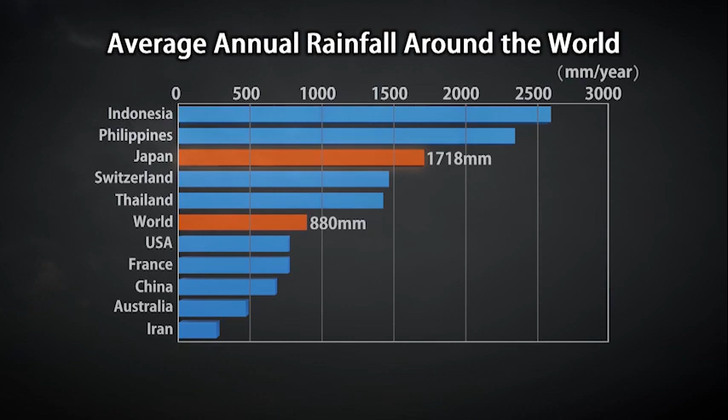Located in the Asian monsoon region, annual rainfall in Japan totals about 1,700 millimeters. This is about twice the global average. Rainfall increases from June to October due to the rainy season and typhoons. In addition to the steep, mountainous topography, the climate makes Japan prone to floods.

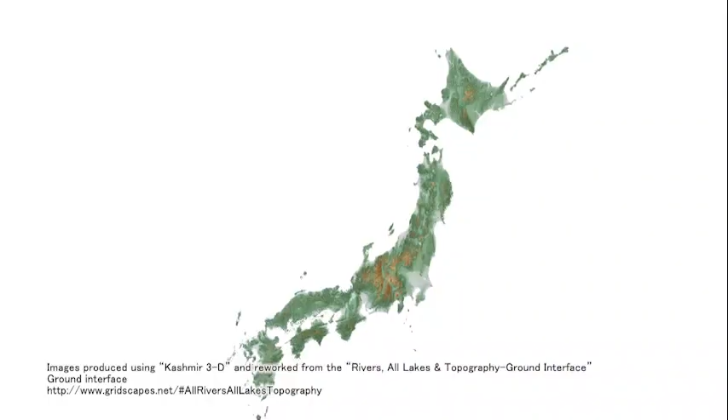With economic growth, significant urbanization took place in Japan. Japan is a small mountainous country, and the population is concentrated on the plains, which account for less than 30% of the country. These images illustrate the urbanization of Tokyo, Japan's capital.

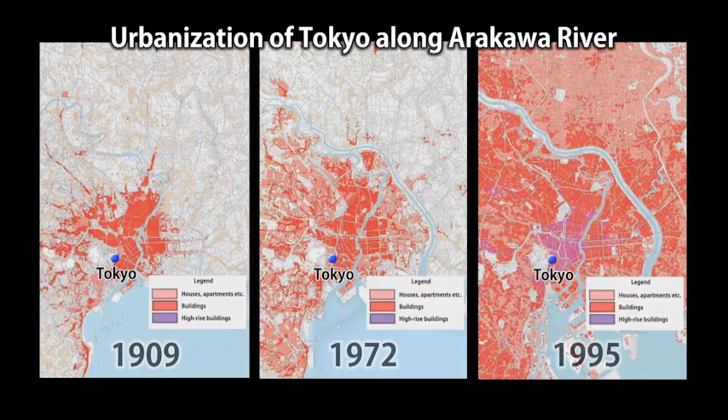Japan's three major metropolitan areas are below mean sea level at high tide. About 50% of the population and 75% of its assets are concentrated in areas prone to flooding and inundation. Cities developed even in areas with a high risk of floods.

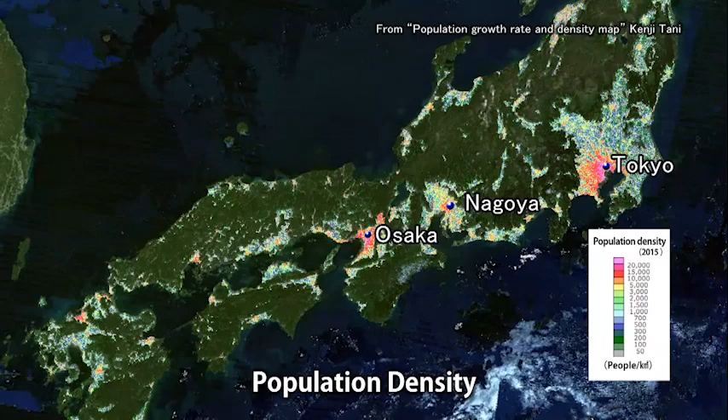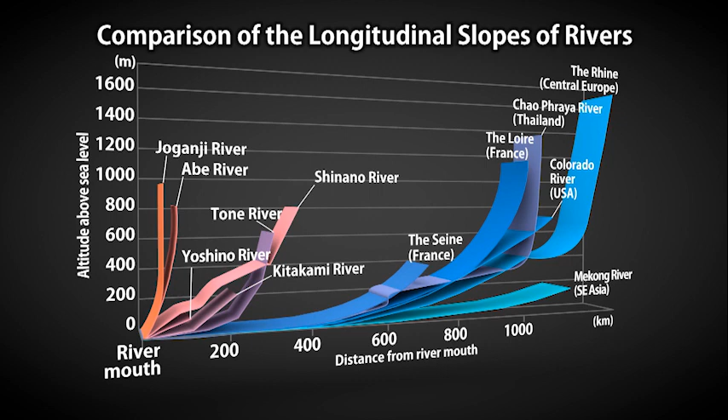Rivers in Japan are quite steep, and their distances from headwaters to mouth are short. Once rain falls, water levels can rise suddenly and reach flood levels in a short time.

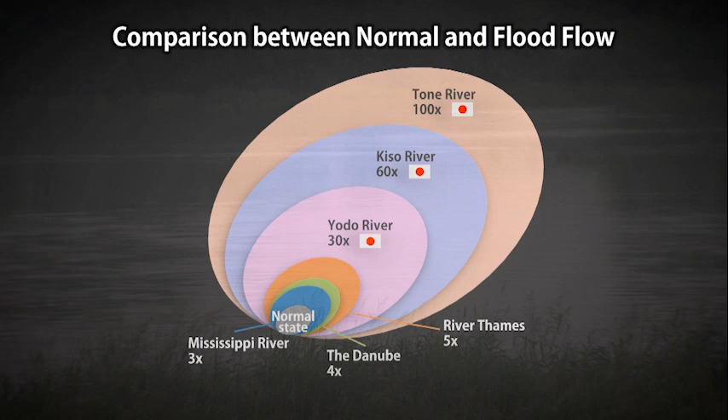During flooding, the flow rate of the Tone River, which has the largest river basin in Japan, can be as high as 100 times the normal rate. This compares to 4 times the normal rate for the Danube and 3 times normal for the Mississippi River. Japan's rivers tend to see sudden, massive flooding that spreads downstream.

The greater need to pursue flood risk reduction measures emerged while struggling to ensure sustainable urban development in river basins. Japan therefore began integrated river management. The government established a law that identified where responsibilities lay, with river administrators in charge of daily maintenance, flood control, water utilization, and the environment.

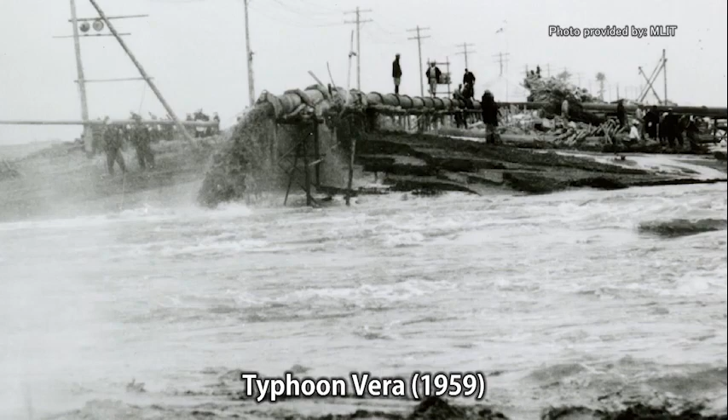Typhoon Vera, which killed more than 5,000 people in 1959, was a wake-up call for Japan. As a result of investment in disaster risk reduction, the number of flood-related deaths successfully declined to 1/100th of that in the 50 years since. The risk reduction measures also supported economic growth.

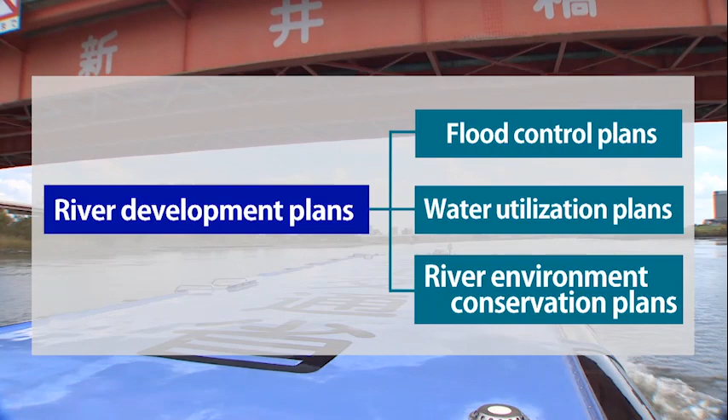Rivers have flooding characteristics that depend on topography and climate. To ensure efficient and effective management, river development plans must be formulated in accordance with the characteristics of a river. River development plans consist of flood control, water utilization, and river environment conservation plans. Let's take a look at the process of formulating a flood control plan.

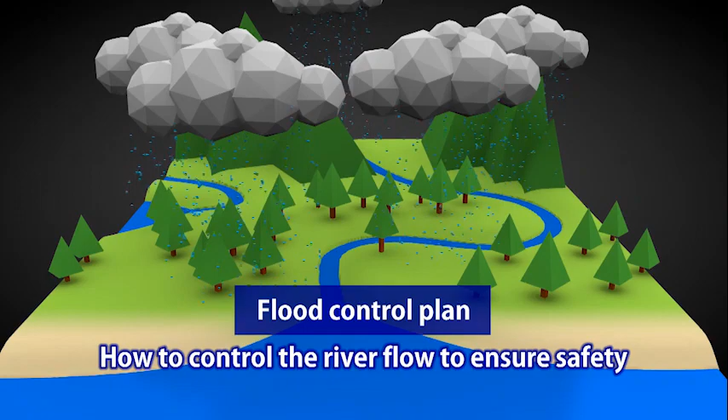This is the flow of flood control plan formulation. A flood control plan estimates how much rain falling in a catchment area will flow into rivers. It considers how to control the flow to ensure safety. In Japan, the target of the plan is based on such matters as the basin's population and assets, the priority of the river, and its disaster history.

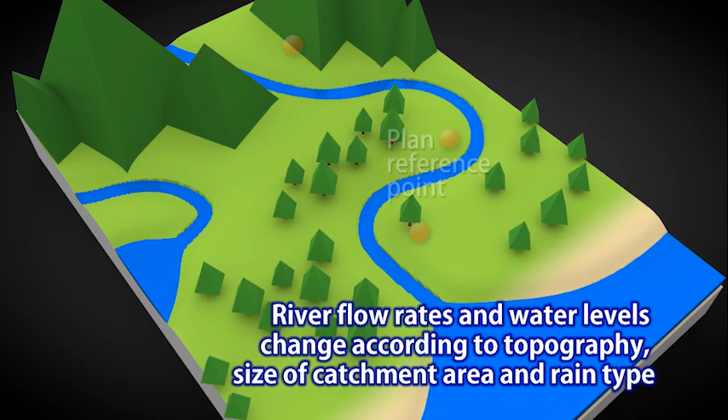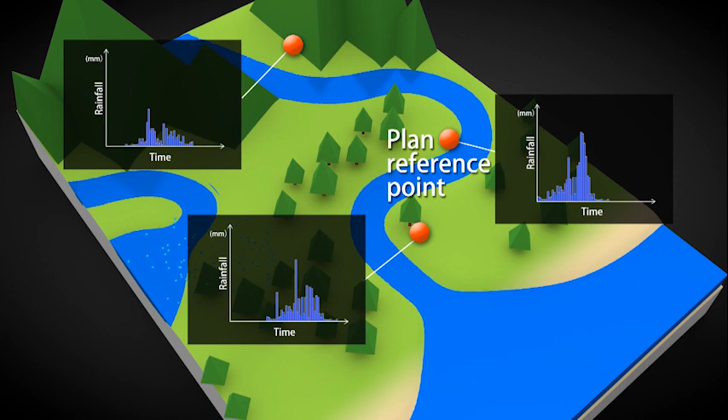A river's flow rate and water level differ according to topography, the size of the catchment area, and the amount, intensity, and duration of rainfall. The runoff of rainfall to the rivers is assessed according to river discharge capacity and land utilization of the catchment area.

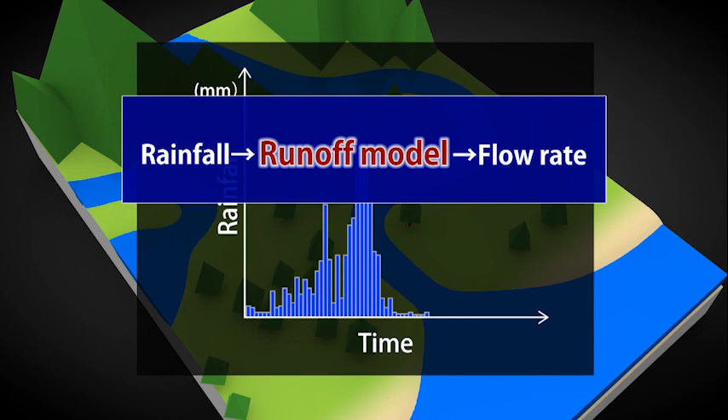Surveyed data convert rainfall in the catchment area into a river flow rate with a runoff model, using data such as past rainfall, river water levels, and flood watermarks. The repeatability of a model is important when forecasting flow rates. The accumulation of past data and its reliability play a crucial role in creating a good model.

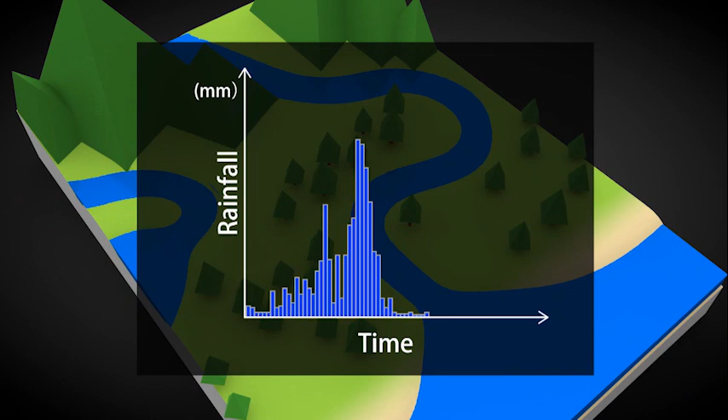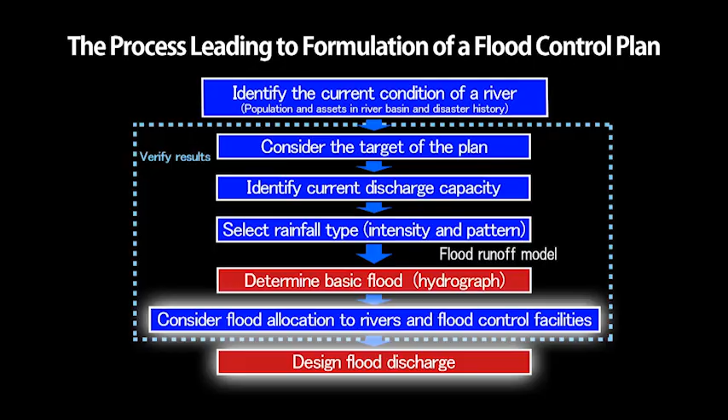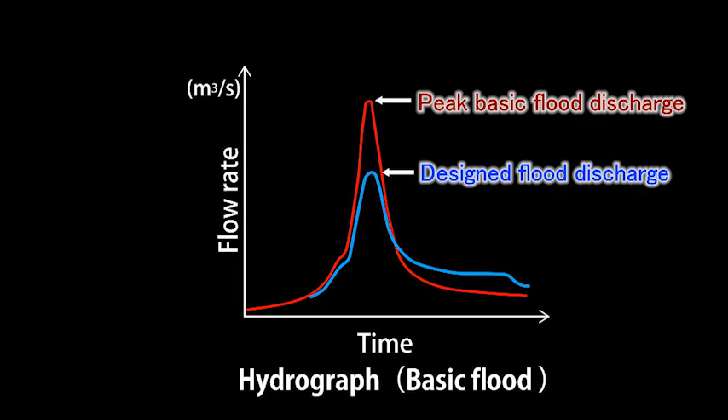River administrators consider how to allocate the basic flood discharge between dams, flood control basins, and rivers to determine the design flood discharge, which becomes the target used in structural measures. The design flood discharge is used as a basis for developing river flood control measures, such as embankments and dredging.

It is important that the plan takes a long-term perspective, giving consideration to future land utilization and facility maintenance. River management requires budgets and time. Japan undertakes staged works to enable efficient and effective management, formulating long-term river management basic policies and medium-term river improvement plans based on the basic policy.

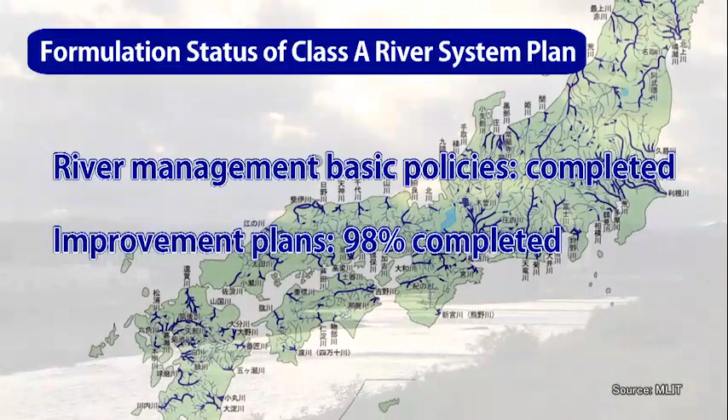As of July 2018, river management basic policies had been formulated for all 109 government-managed river systems. Meanwhile, medium-term plans and river improvement plans have been formulated for 98% of river systems. The government allocates budgets and carries out management on the basis of a nationwide balance that comprehensively considers the progress of works, regional characteristics, and disaster tendencies.

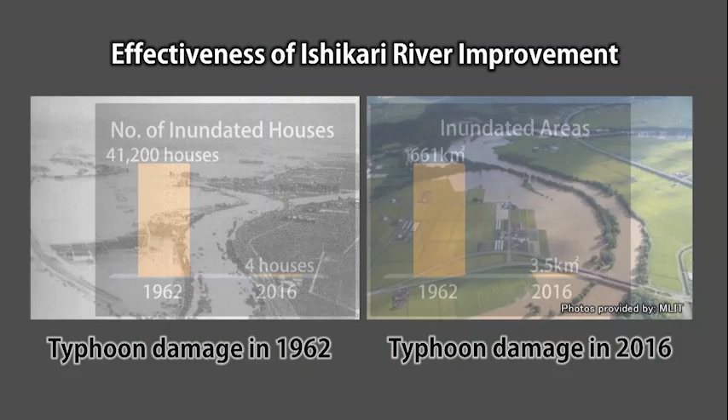For example, Hokkaido's Ishikari River had frequently flooded and caused extensive damage. A progression of step-by-step flood control measures achieved significant decreases in damage, even when met with a typhoon of the same scale as that of some 50 years ago. It is vital to make pre-investments in risk reduction before an actual disaster occurs. This reduces the cost of damage by several times the cost of that investment.

Flood control measures cannot be achieved overnight. That is why it is critical that the importance of measures is fully recognized, appropriate steps are taken, and steady implementation is carried out. The first step is to develop a data-based plan. It is the most important step for moving forward with flood control measures.

Flood control measures create the infrastructure that becomes a foundation of economic growth. That's why advance investment to mitigate disasters is best, instead of panicking after a disaster occurs. There have been some very serious disasters in recent years. We have to start thinking about how to deal with them, or the measures taken may stop working.

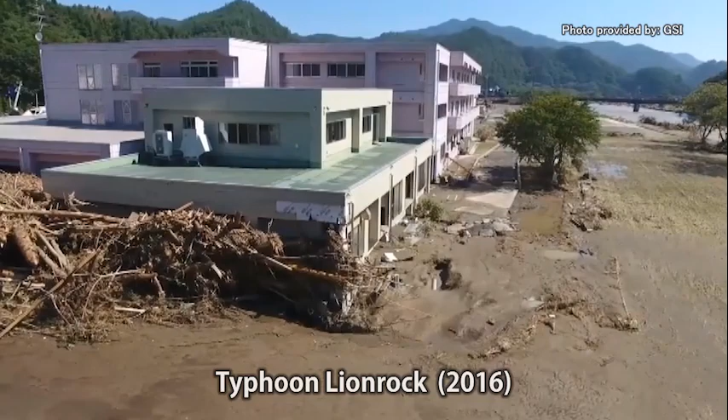Even if a country takes measures to mitigate risks, natural disasters that exceed the designed size can strike sooner or later. We cannot stop natural phenomena, such as earthquakes and typhoons, from occurring. However, we can reduce risks or mitigate damage by strengthening our capacity to deal with them. JICA provides assistance to enhance risk management capabilities in each stage of the disaster management cycle, that is, prevention and mitigation, preparedness, emergency response, and rehabilitation and recovery.

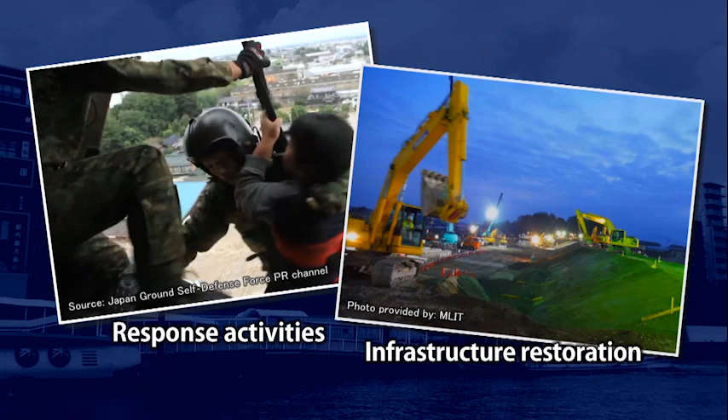In extensive disasters, all ministries are mobilized for response activities. Infrastructure restoration is mainly handled by the Ministry of Land, Infrastructure, Transport and Tourism, or MLIT, with local governments. MLIT has local branch offices across Japan. The Kanto Regional Development Bureau is one such office. It administers 104 rivers and 8 river systems in Tokyo and 8 neighboring prefectures. Its field offices on site oversee construction and management of the rivers.

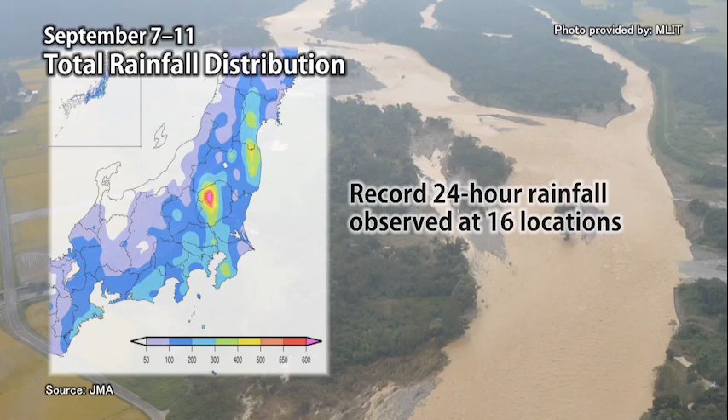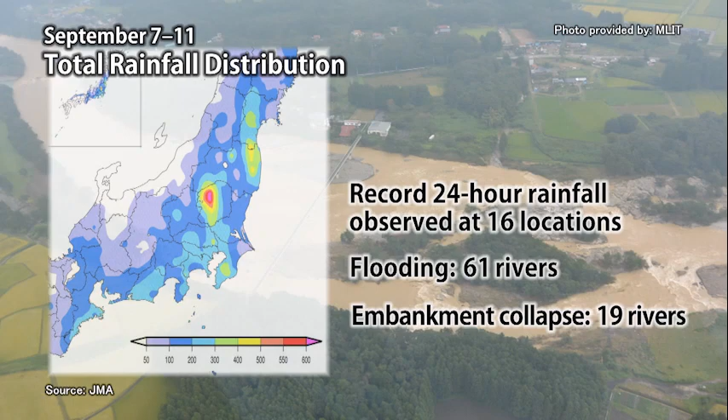To learn how Japan responds to disasters, let's look at the case of the September 2015 torrential rains. Historic rainfall fell at this time in the Kanto and Tohoku regions. It flooded 61 rivers. The rain increased river flow and caused damage, such as embankment collapse at 19 rivers. One of them was the Kinugawa River.

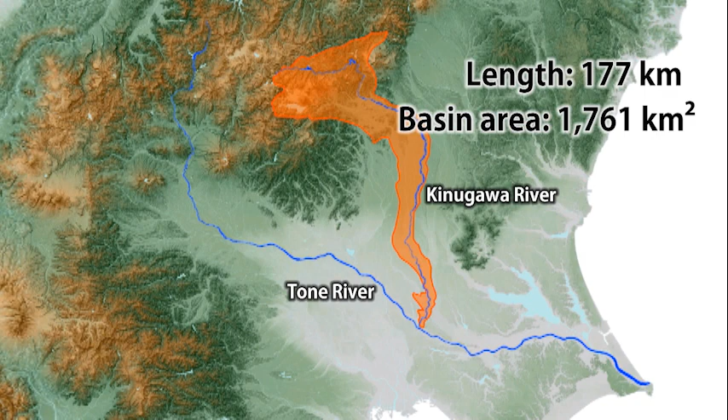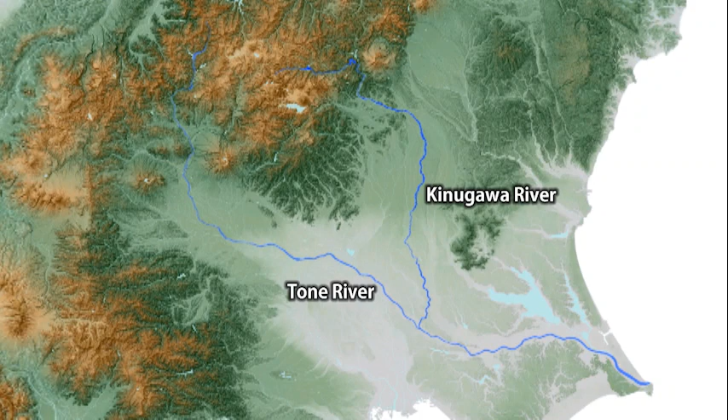The source of the Kinugawa River is a marsh located 2,040 meters above sea level. The river flows into the Tone River. About 177 kilometers long, the Kinugawa River basin is 1,761 square kilometers. It is a Class A river managed by the Shimodate River Office, which is a field office. Efforts to control flooding of the Kinugawa River date back more than 100 years to 1900. The government formulated the master plan of the Tone River, which also included the flood management plans of the Kinugawa River.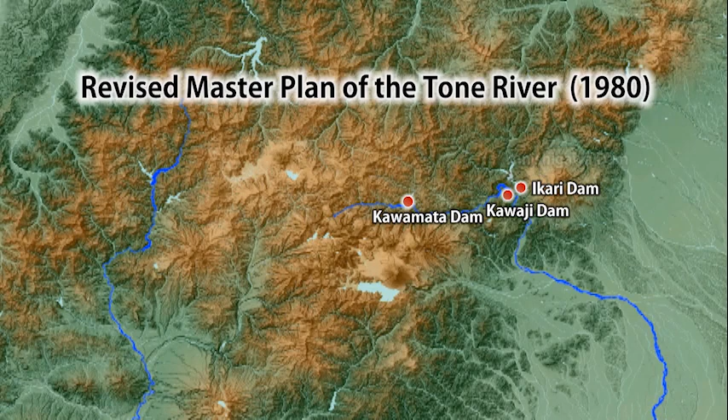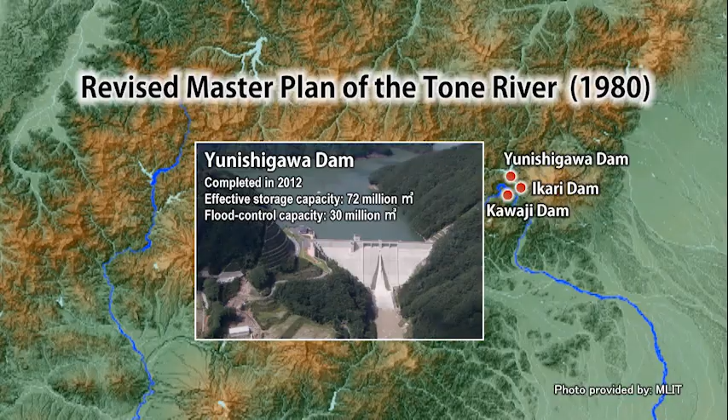Based on this plan, the central government built 3 dams in the upstream Kinugawa River. It also carried out a series of river improvement works. The plan was later revised to increase flood control capacity. Construction of the 4th dam started in 1980 and was completed in 2012. The Kanto-Tohoku torrential rains of September 2015 occurred between September 9 and 11. Due to a series of typhoons, a linear rain band formed, causing extreme downpour in a single belt-like zone.

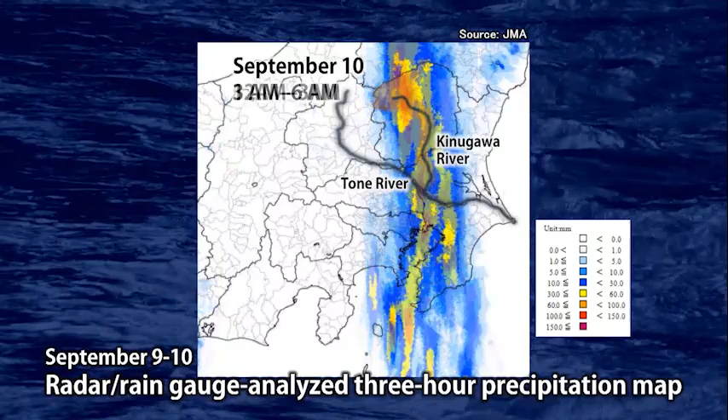September 8th, 3 p.m. The MLIT Regional Office set up the Regional Emergency Operations Center based on predetermined procedures. The mode was in watch status in preparation for a looming disaster. The next day, 1:30 p.m., the mode was upgraded to alert status. The same day at 10:54 p.m., the director of the field office called the mayor of Joso City.

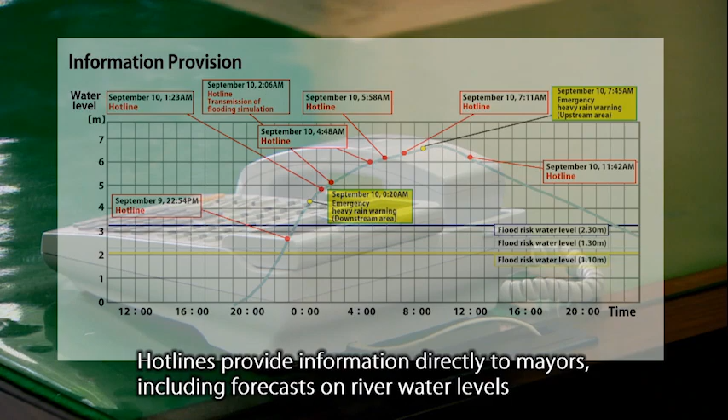As a river administrating agency, MLIT provides information and forecasts on river water levels to local governments. In emergencies, MLIT provides information directly to local mayors to support their decision-making for evacuation orders. Based on the information provided, the mayor of Joso City set up emergency headquarters and commenced disaster response. September 10th, 12:20 a.m. A few hours later, the Japan Meteorological Agency issued an emergency heavy rain warning for the upstream Kinugawa River. 7 hours later, the warning was expanded to include downstream areas.

At 2:20 a.m., the mayor of Joso City issued evacuation orders to some areas of the city. 4:50 a.m., the regional office dispatched machinery such as drainage pump trucks and mobile lighting trucks to the area, placing them on standby.

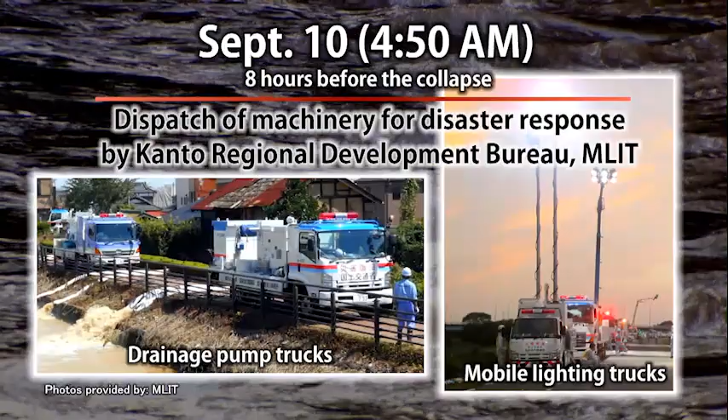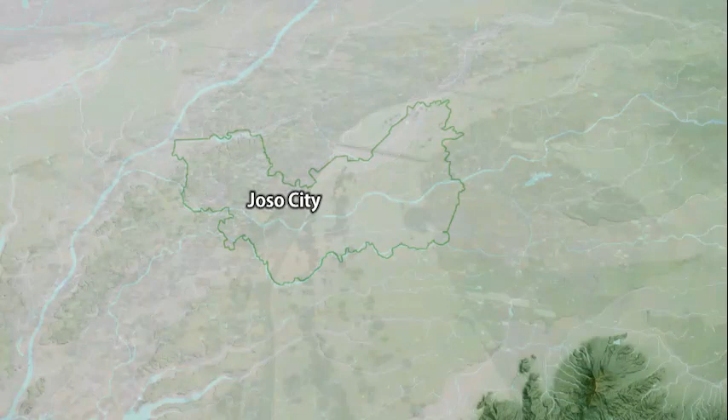September 10th, 12:50 p.m. The embankment collapsed along the Kinugawa River in Joso City. The water level reached a record high of 8.06 meters. This was about 70 centimeters above the designed high water level. Kinugawa faced considerable damage, such as overflow and leakage at 30 locations, in addition to embankment collapse along the Kinugawa River.

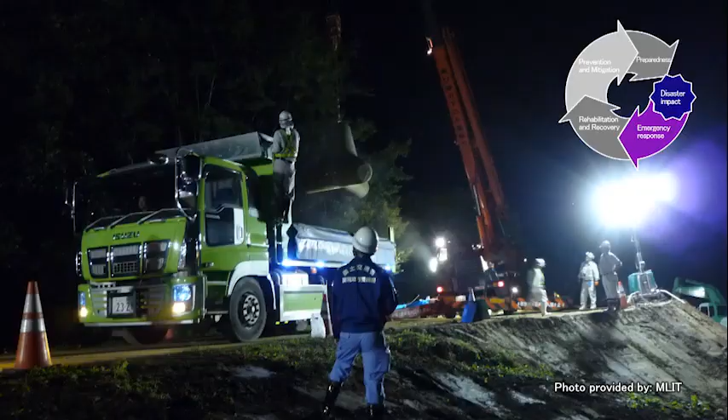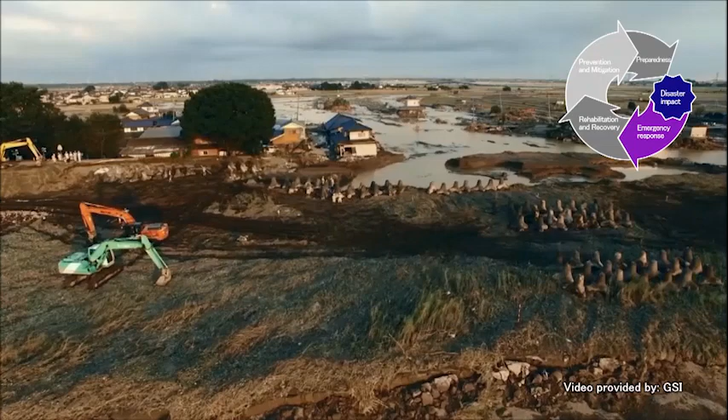MLIT immediately set up headquarters for emergency operation. The first meeting was held just 55 minutes after the collapse, with the minister issuing instructions to hasten confirmation of damage and the achievement of early recovery. Within 9 hours after the collapse, the regional office immediately initiated emergency recovery works. Prompt recovery was critical, not only to prepare against the next rainfall, but also to enable evacuees to return home as soon as possible.

We spoke with the person who directed the works as head of the construction site. The difference between normal and emergency recovery works is whether you have designs and drawings. We usually spend a lot of time and budget to prepare those drawings, but there were none for our emergency work. Recovery works commenced using hand-drawn sketches created based on experience. A temporary embankment was first built, followed by reinforcement work to prevent water infiltration.

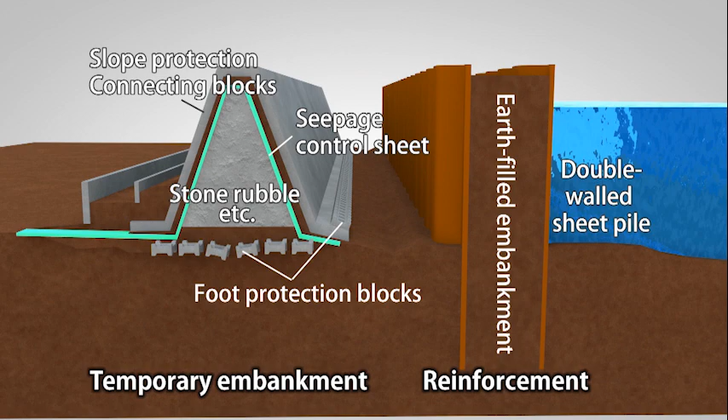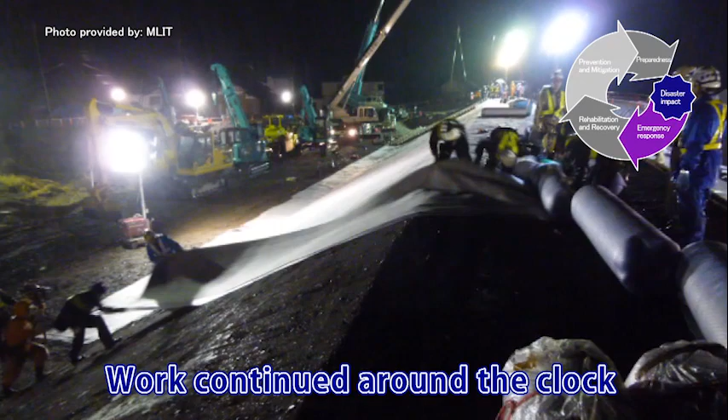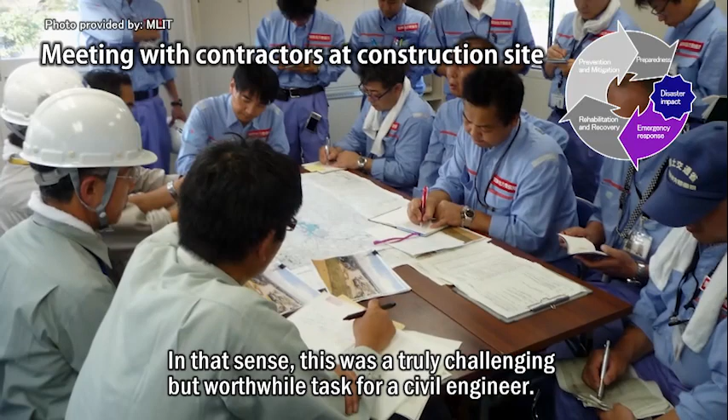The work started about 9 hours after the collapse and continued around the clock. A 200-meter-long temporary embankment was completed in just 6 days. Reinforcement work was then undertaken using concrete revetment blocks and steel sheet piles. All emergency recovery work was completed in just 14 days. There was no time for lengthy discussions. We had to make fast decisions. In that sense, you could say that it was a challenging but worthwhile task for a civil engineer.

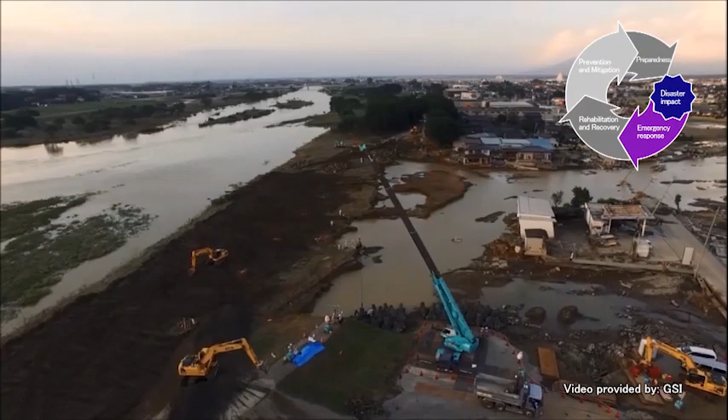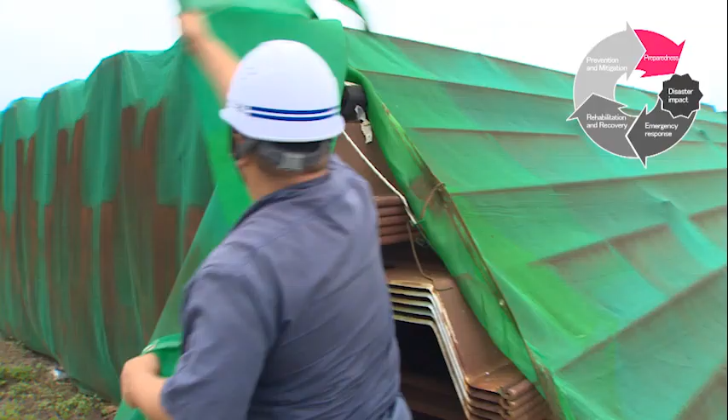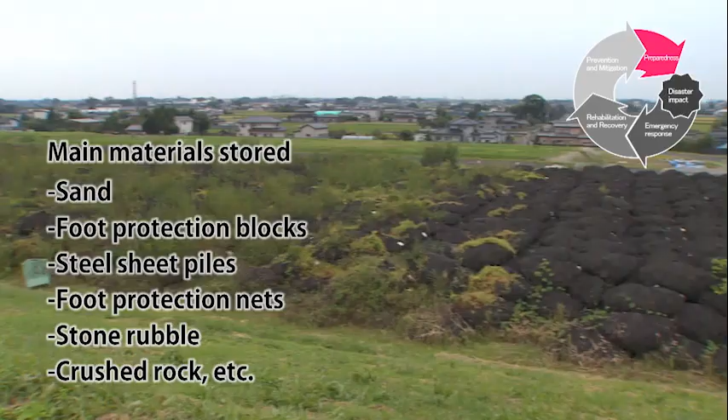A major factor that enabled immediate recovery was the speed of the initial response. MLIT had exchanged an agreement with the Federation of Construction Contractors in advance to conduct first response exercises. Based on the agreement, 48 companies responded to the call. The existence of stations to store flood-fighting materials also played a significant role. These stations contain emergency materials for use in disasters, such as sand, concrete blocks, and steel piles. 3 neighboring stations supplied materials for restoration work for this flood. MLIT has 136 such storage stations all over the country.

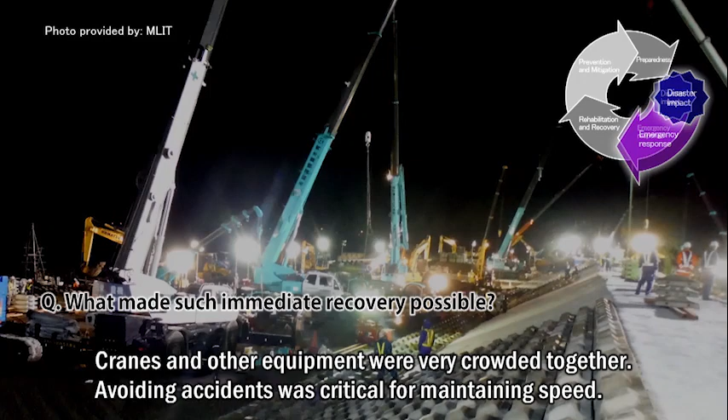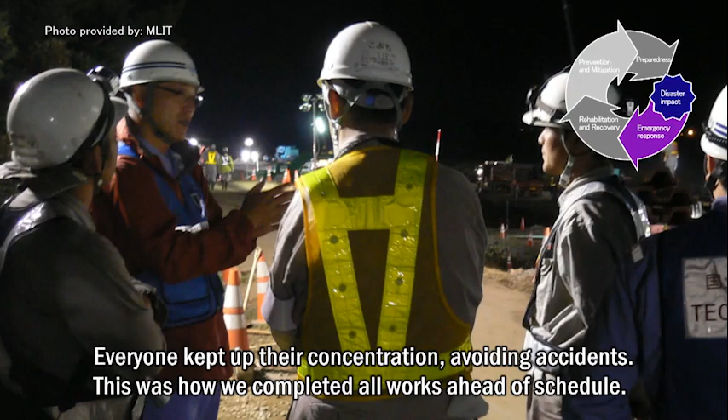With cranes and other equipment very crowded together, avoiding accidents was critical for maintaining speed. All work would have stopped if any had come into contact. Everyone kept up their concentration. This was how we completed all works ahead of schedule. The evacuation order and evacuation advisory were lifted when the government completed the works.

What are the most important aspects of such on-site recovery? One is having a positive, proactive focus on speed. That's important because if you try to consider all the details, you end up just wasting time. At first, we create a rough overall outline. It doesn't matter if you end up with some extra machinery, people, or materials. It's important that you don't run out of things or people partway through and have to make additional arrangements.

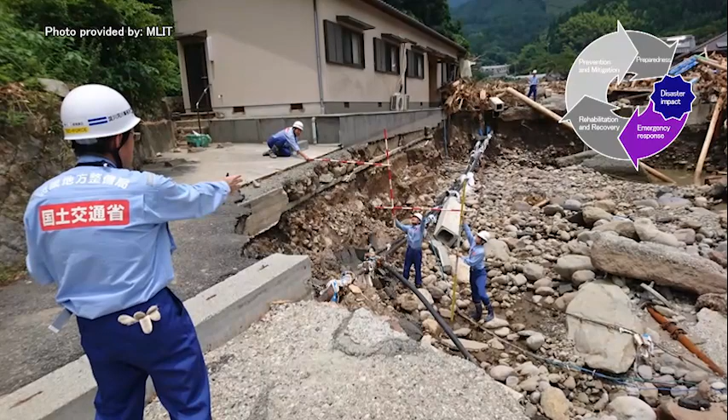About 2,400 members of MLIT's Technical Emergency Control Force, or TEC-FORCE, immediately gathered from all over Japan. The TEC-FORCE, established in 2008, consists of MLIT employees. If a large-scale natural disaster occurs, or there is such risk, the TEC-FORCE determines the extent of damage, prevents expansion of damage, and enables the quick recovery of disaster-hit areas. There are about 9,700 MLIT employees registered nationwide as TEC-FORCE members, ready to be mobilized when a disaster occurs.

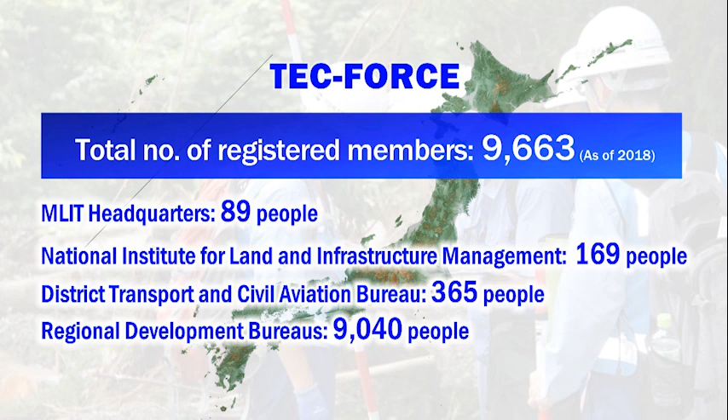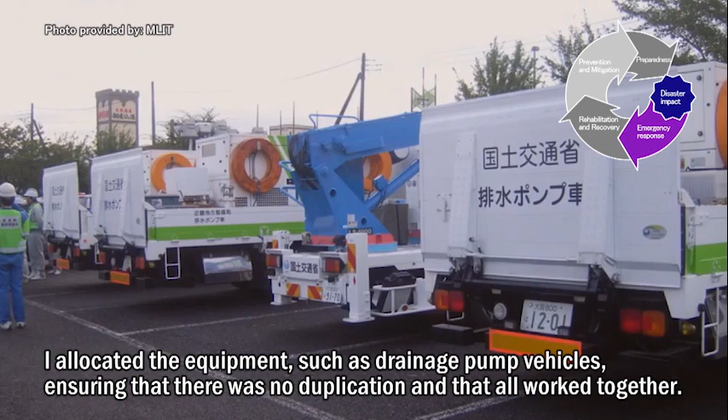The TEC-FORCE gathered at the regional office from across Japan. They undertook water drainage activities and surveys to confirm the damage situation. The head of the TEC-FORCE recalled the operation. We brought in staff from around the nation. I allocated the equipment, such as drainage pump vehicles, ensuring that there was no duplication and that all worked together. My biggest task was to manage equipment and personnel to achieve maximum effect.

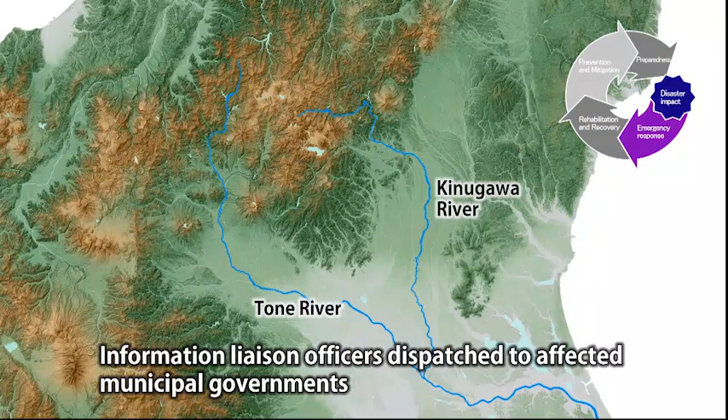The regional office also facilitated communication, sending information liaison officers to 23 municipal governments. They served as contact points to coordinate support needs in disaster-affected areas. It also carried out round-the-clock recovery work, liaising the construction site with MLIT headquarters and local governments. Everyone is excited and energetic at first because it's an emergency. But it's hard to keep it up for more than 2 weeks. The demarcation of tasks and an effective work shift system are needed to keep the work going until the end.

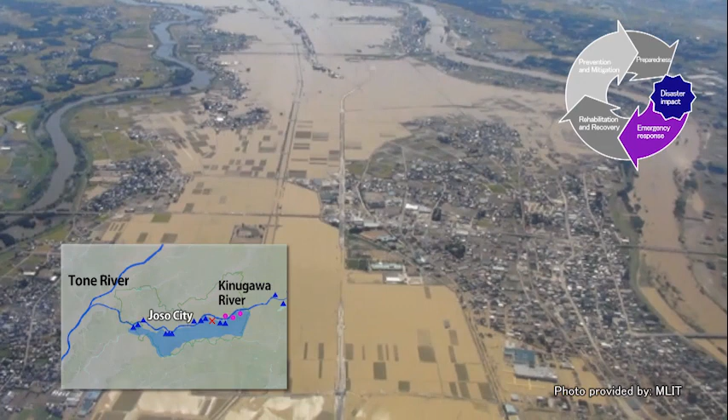Damage in Joso City included inundation of about 1/3, or 40 square kilometers, of the city. Roughly 5,000 homes were fully or partially destroyed. Many residents did not evacuate in time and were stranded, and 4,300 people were rescued.

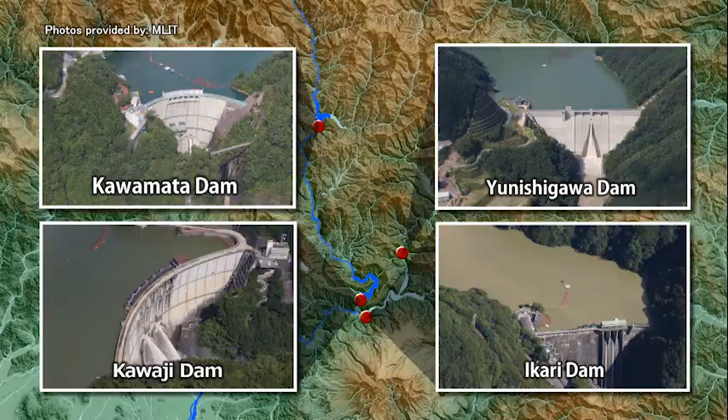This disaster demonstrated the critical role of dams in flood control. There are 4 dams in the upper reaches of the Kinugawa River. The local MLIT Integrated Dam Operation Office tried to hold as much water as possible upstream in Kinugawa River dams through a coordinated operation of the 4 dams.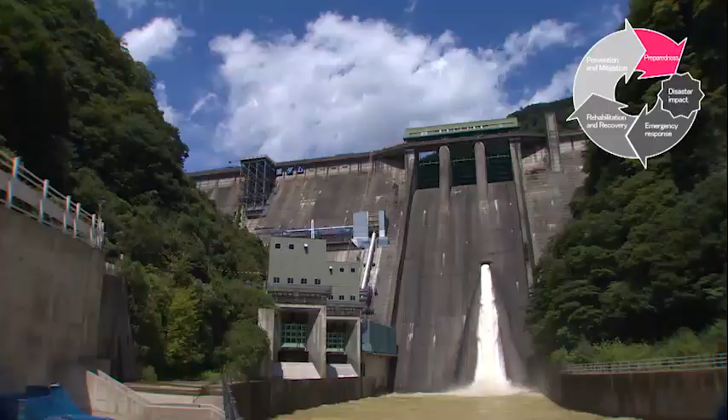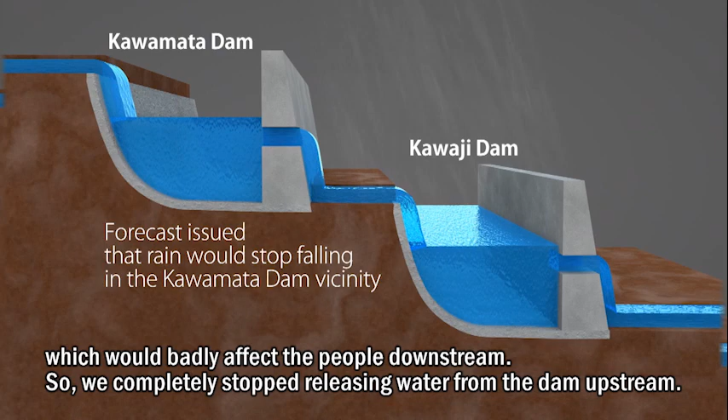Around midnight on the 10th, when water levels exceeded flood risk levels downstream, the office made a major decision. Looking at the expected rainfall, we knew that Kawaji Dam would overflow in the next 3 to 4 hours, which would badly affect the people downstream. So we completely stopped releasing water from the dam upstream. This would reduce inflow to Kawaji Dam, thereby preserving its capacity.

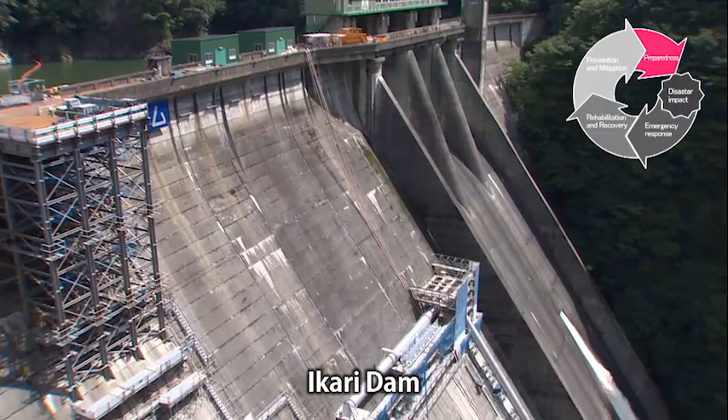Ikari Dam also experienced its highest ever inflow, but flood control operations continued in coordination with upstream dams. About 100 million cubic meters were retained by the 4 dams in addition to the designed flood control volume.

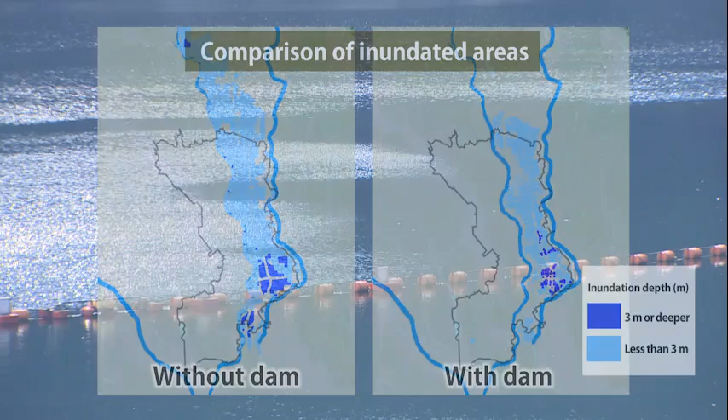Post-disaster evaluation clarified that the 4 dams served a vital role in the mitigation of downstream flood damage in the following ways. They reduced the water level of the downstream Kinugawa River, reduced inundation downstream by 1/3, reduced the area inundated by 2/3, and halved the number of flooded houses.

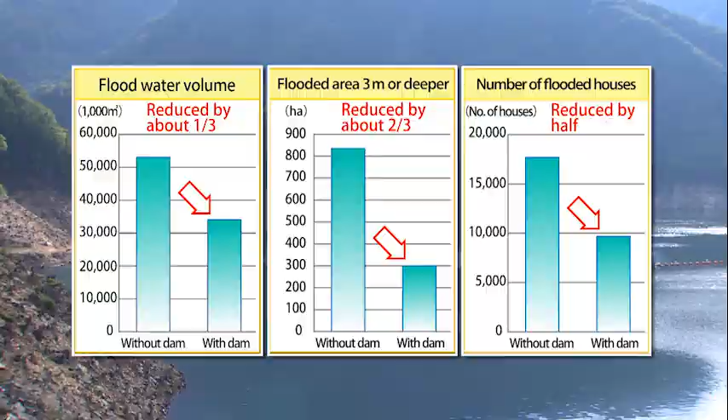We monitor, maintain, and operate dams 24/7 while understanding downstream situations. Daily experience enabled our decisions. Phased development of structural measures gradually increased Japan's flood safety. However, these torrential rains saw about 4,300 stranded individuals requiring rescue. While the development of structural measures successfully increased safety levels, psychological dependency on structural measures delayed evacuation.

To share the lessons learned from the Kinugawa River floods, the central government formulated the policy vision on rebuilding flood-conscious societies in December 2015. This initiative works as a fail-safe backup to structural measures for the case that floods exceed design levels and spill over the infrastructures. For non-structural measures, it emphasizes a shift from government to community-led activities.

This field office is working on the Kinugawa River Emergency Project to expedite river development construction works and to develop and disseminate flood risk reduction awareness. The central government, Ibaraki Prefecture, and the 7 municipalities in the downstream Kinugawa River basin carry out these integrated structural and non-structural measures.

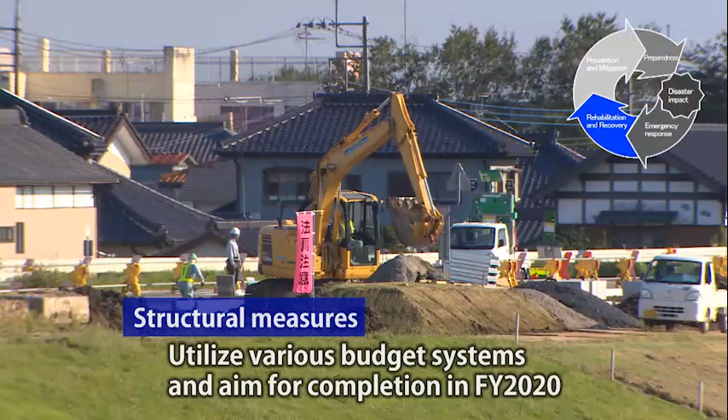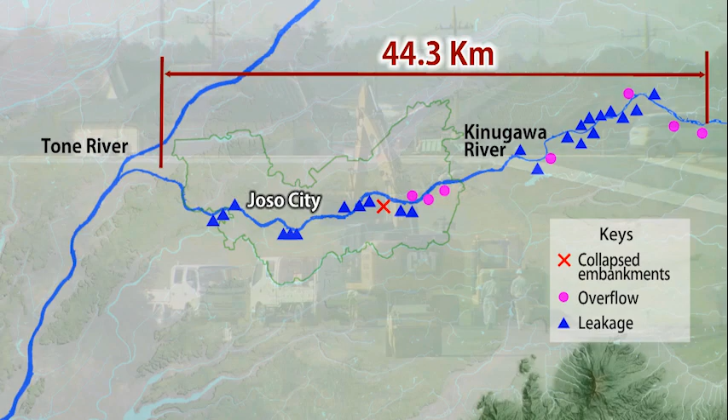For full-scale recovery, there is a special budget system in Japan to start recovery work immediately after a disaster. The Kinugawa River Emergency Project utilizes various budget systems and aims for completion in fiscal year 2020. The project targets not only areas with inundation, leakage, or collapsed embankments, but also the entire 44.3-kilometer stretch of downstream Kinugawa River. The project is raising or widening embankments on both sides as well as dredging the river. The total cost of these river improvement works will reach approximately $600 million.

We created a 5-year action plan with a list of activities to prevent the recurrence of disasters. The biggest challenges were how to accelerate the speed of implementation and how to reduce costs. On May 27, 2016, 8 months after the Kanto Tohoku torrential rains and before the start of the flood season, work was completed at locations where embankments had collapsed.

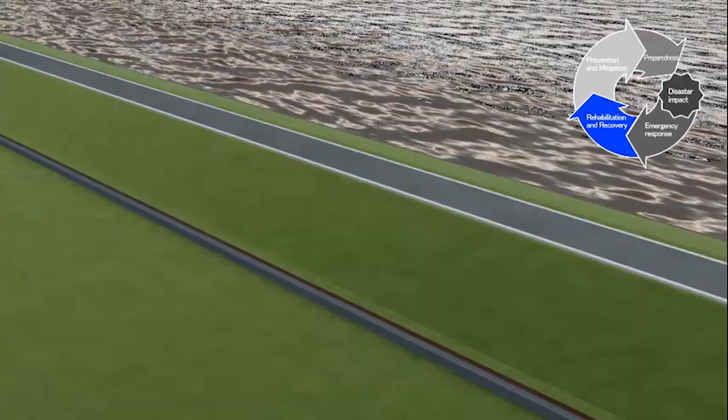The Kanto Tohoku torrential rains caused floods that exceeded the standards of the time. Therefore, the new embankments were designed to ensure safety even in a similar rain event by raising the new embankments by 1.9 meters to 5.4 meters. The width of the levee crown was also widened to 6 meters from the original 3 to 4 meters.

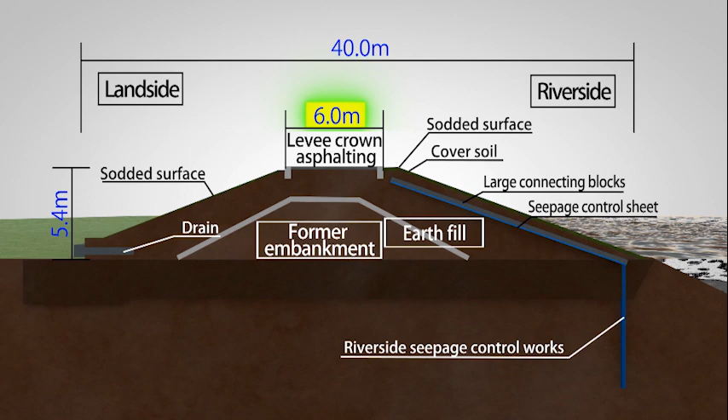Non-structural measures aim to leave no person behind. Floods could exceed structural measures. That's why the leading role in non-structural measures has to be shifted to residents. Making the transition requires good communication, even while construction is still underway. One example is the My Timeline project.

The field office has prepared teaching materials that are introduced in disaster risk reduction education in elementary and junior high schools. The aim of the project is to enable each resident to protect themselves from floods by creating their own evacuation timeline. Residents should know what to do at each stage, such as the approach of a typhoon, rise of river water levels, or the issuance of an evacuation advisory.

We want children to be able to share their learning and experiences with the broader community. The My Timeline project has the participation of many residents and has grown significantly.

After having experienced the Kanto Tohoku torrential rains, the citizens and government of Joso City recognize that disaster risk reduction is essential for our future. We have to undo our reputation as the flood-damaged Joso City. In other words, we may have experienced floods, but we now want to be known as a city that is proactively and innovatively reducing disaster risks.

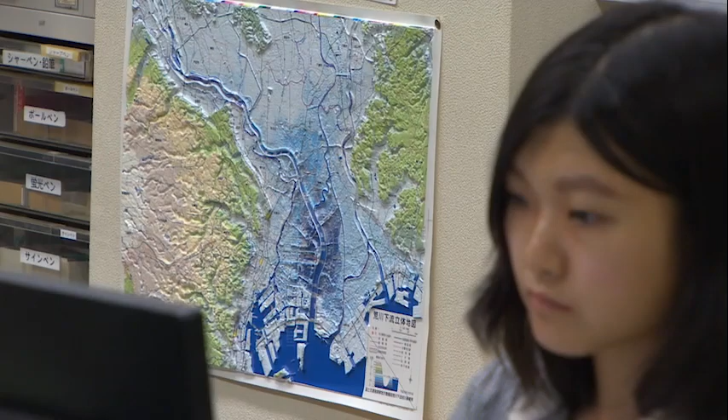The central government, local authorities, and individual residents are working to reduce disaster risks, preparing for the next disaster by leveraging their strengths and practicing Build Back Better will enable stronger regional development.

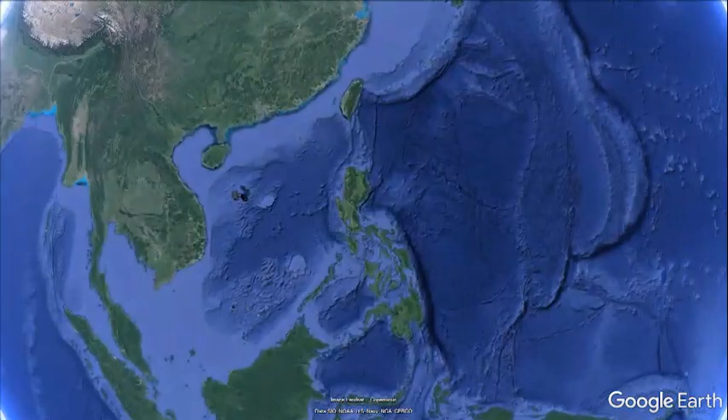JICA utilizes the expertise, experience, and technology of Japan to support flood control measures in developing countries. Let's now look at the example of JICA projects in the Philippines. Metropolitan Manila developed around the capital of the Philippines. The Mangahan floodway plays a critical role for flood control in densely populated metropolitan Manila.

With JICA's assistance, the government of the Philippines started construction on this 8.5-kilometer floodway in 1980 and completed it in 1988. The Marikina River and Pasig River flow through metropolitan Manila, which has a population of some 13 million people. The Mangahan floodway diverts the Marikina River into Lake Laguna, thereby reducing the volume of water flowing to downstream Pasig River. This reduces the flood risk of the Pasig River.

In 2009, the floodway showed maximum efficiency when Typhoon Ondoy, which caused damage that affected nearly 5 million people, struck metropolitan Manila. The floodway diverted the water from Marikina River to Lake Laguna at a rate of about 3,000 cubic meters per second. Around the Pasig River, flood damage was limited to certain districts, enabling a quick recovery.

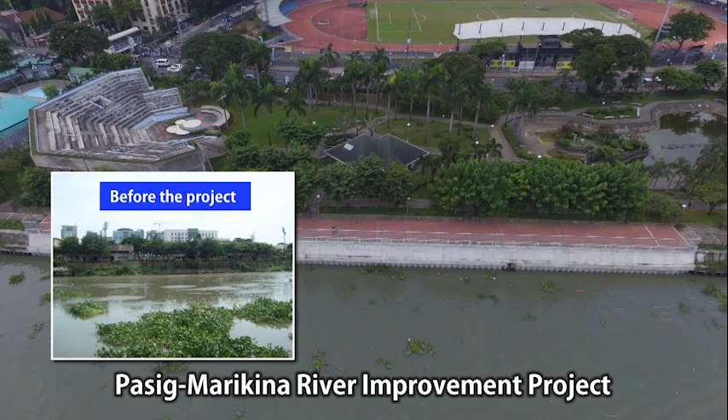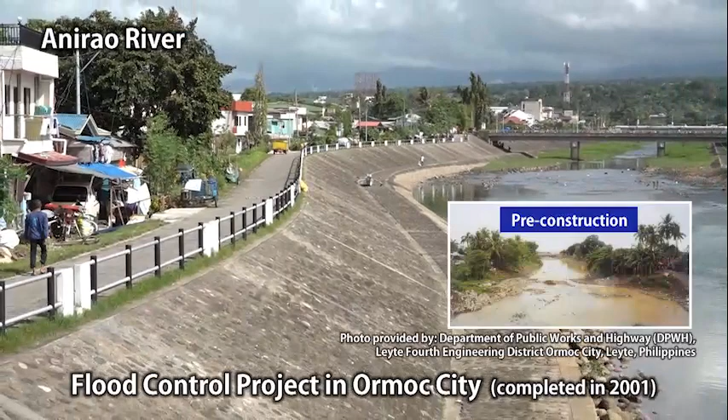This is Ormoc, a city on Leyte Island in the Philippines. Tropical storm Thelma struck in 1991, causing massive damage, with 8,000 people lost or missing. Between 1996 and 2001, JICA provided assistance for river embankment construction and other flood control projects. Local districts continue to operate and maintain these facilities. Even now, 20 years after project completion, they continue to reduce flood damage caused by typhoons.

JICA has been very instrumental in nation building as far as the Philippine government is concerned. JICA or the government of Japan, when they do some assistance, it covers almost from the start all the way to the completion. Their adaptability on the structures, on their design, the technology can really be best suited for Philippine geography.

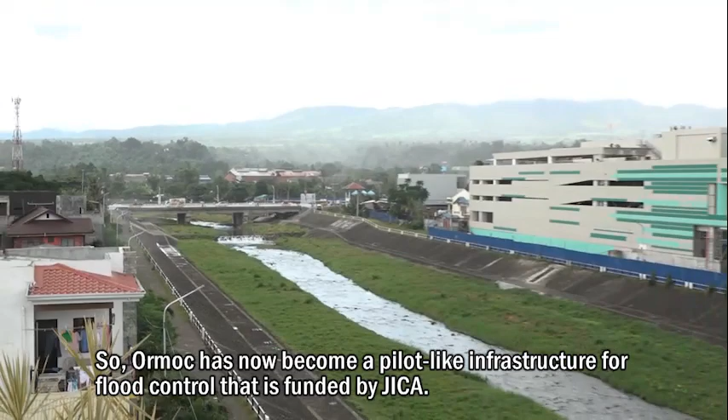So Ormoc has now become a pilot-like infrastructure for flood control that is funded by JICA. It becomes a model to all other urban cities and countryside development we have now. The Build, Build, Build under this golden age of infrastructures was actually seen as the fastest way of boosting the economy on development, especially giving more importance on the infrastructure.

So we saw the need to have more investment on flood control because the requirement for addressing flooding may not only be focused on urban centers, but this time we need to go to the countryside area to address a more holistic program for the entire Philippines. Flood control measures lead to improvement of the local living environment and economic growth. What does each country need to do when going forward with flood control efforts?

I think that three things are critical: government leadership, budget allocation through such leadership, and the capacity to utilize that budget. In particular, capacity means collecting all types of historical data or designing and planning projects based on such data, then managing the projects, collecting the next set of data, feeding it back to the plan, and sequentially creating a positive cycle to improve the plans. These are the necessary processes.